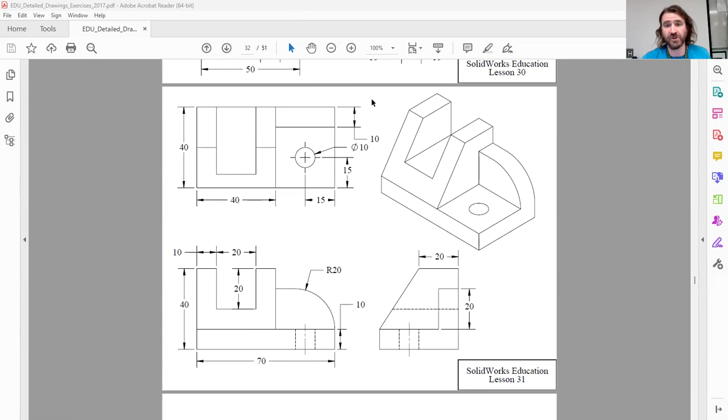We could start this from the front view and be completely fine, or we could also do the top view either way. I'm going to do the front view because this curve is here. This profile can be extruded 10 and it's done. This whole rectangle on the bottom can be extruded the distance of 40, and then we can cut that hole out after extruding. Then this shape can be extruded 40, and we can chamfer that to get this angled amount. That's my thought process with starting with the front view. You could do it at the top as well, but we're looking for the shortest, most comfortable path to get there.

There's a part file that we did earlier, and so is this one. You guys got a preview of an earlier video there, retroactively.

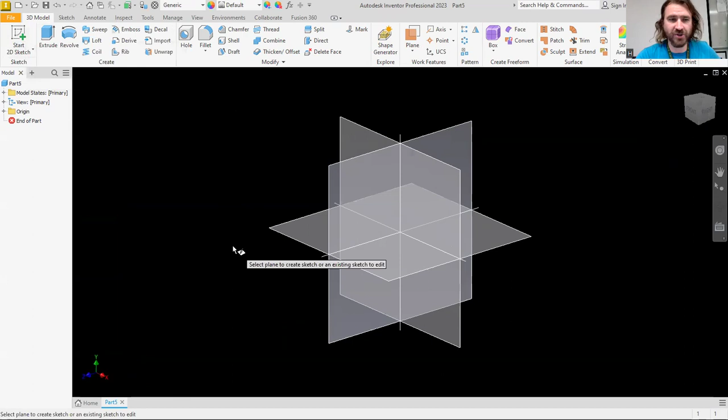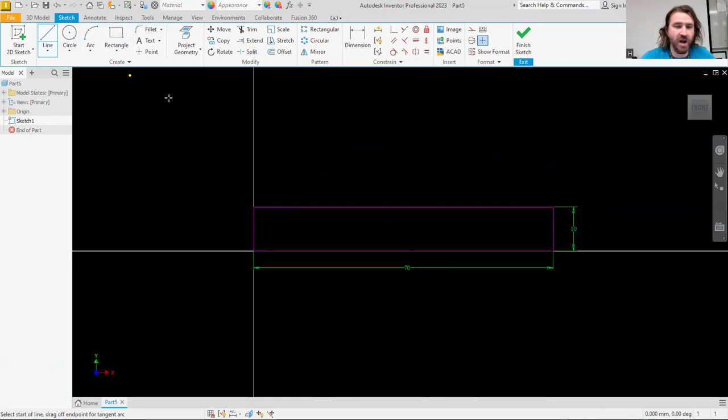So here we're starting our sketch for this part on our front XY plane, starting at the 0,0 mark. We'll go horizontally this time because it's 70, a nice long beginning line to start with. We're going up 10 because this is the first profile we're making, this rectangle shape. We could have just used the rectangle tool in hindsight, but either way we got there. Now lining up vertically, this line is 30, then this line is 10, this is 20, this line is also 20. I'm just kind of going around making 20mm lines here. There's another one, this is 10. I'm going to zoom out here in a minute because it's going to get tricky.

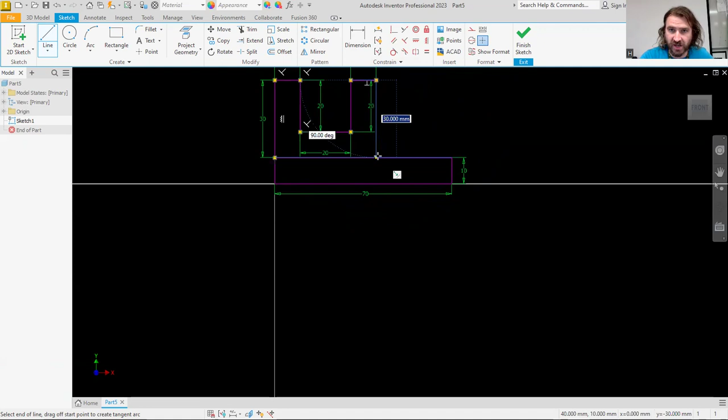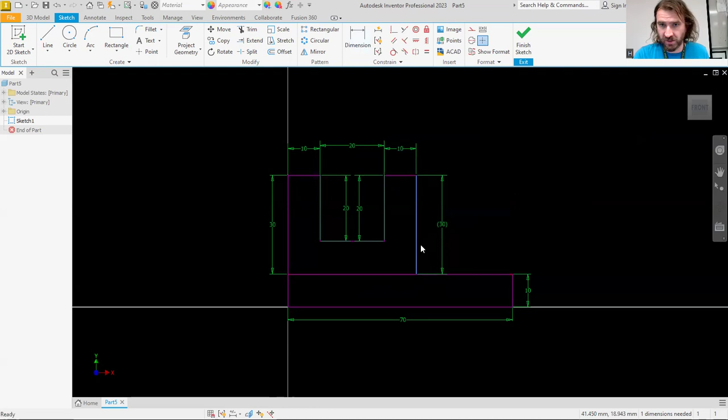Let's take this all the way down to 30, that way we have the profile. Let me zoom this out and clean this up a bit so we can see what is happening. All right, so there's our profile there. Let's dimension that, that is 30, 20. One dimension needed on this line - yeah, we're just going to leave it blue. So we have this profile here, this U shape.

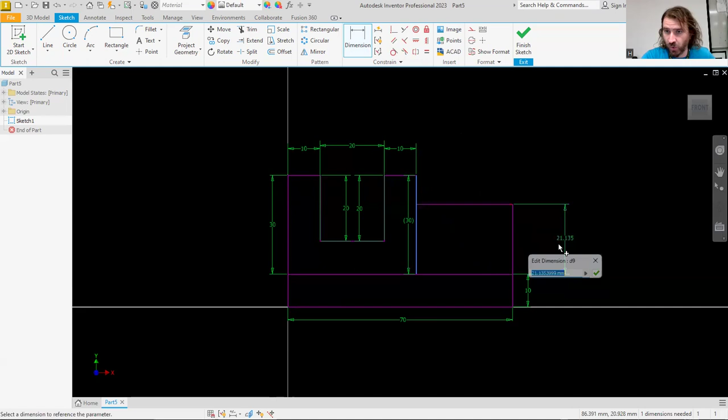Now we have this profile, and we just need the last profile with that curve that is there. So I'm going to draw straight lines and curve it after getting the lines in the right dimension, the right place. This is supposed to be 20, and that means this is 30, and it should be 30. There it is. So now that we've drawn the lines, we can use the fillet tool to do that curvature, and that curve is a radius of 20. There it is, perfect.

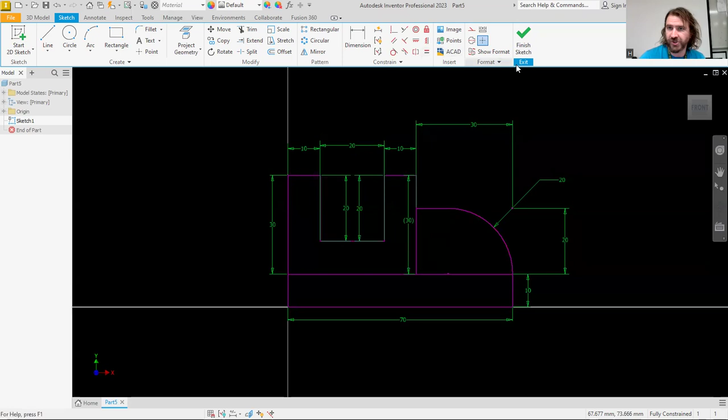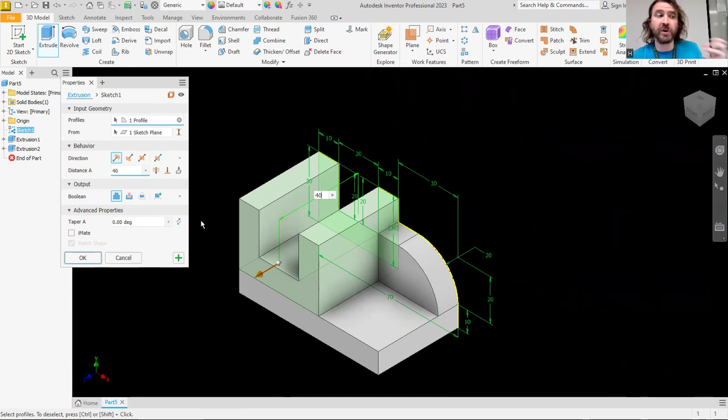So there's our radius 20 line. We have all of our profiles - that's our front view: the rectangle, this funky looking curved wall, and this U shape. Those are the three profiles we needed. Now we need to extrude them out at varying degrees of distance. This is 40, hit the plus sign. This one is 10 because it's just the small wall there, plus sign again. Then this U shape is actually 40 as well, going all the way to the edge, and then we're going to chamfer this, or if we can't chamfer it we could cut it at an angle, which we'll do in a moment. So there's our basic shape here.

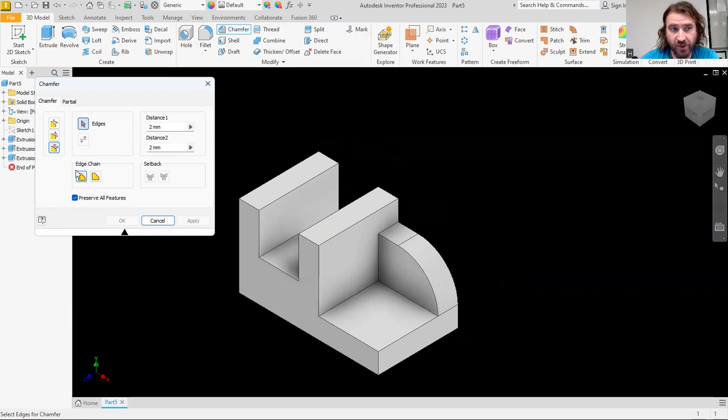So let's see if we can chamfer this - it might be funky, or we'll have to cut it out. I'll go to the chamfer tool, and it's two different distances: the horizontal distance is 20, the vertical distance is 30. Let me click this edge here and also this edge to make sure we're good. So the horizontal distance is 20 - oh no, that's the vertical distance, so 30, there it is. And the horizontal distance is 20.

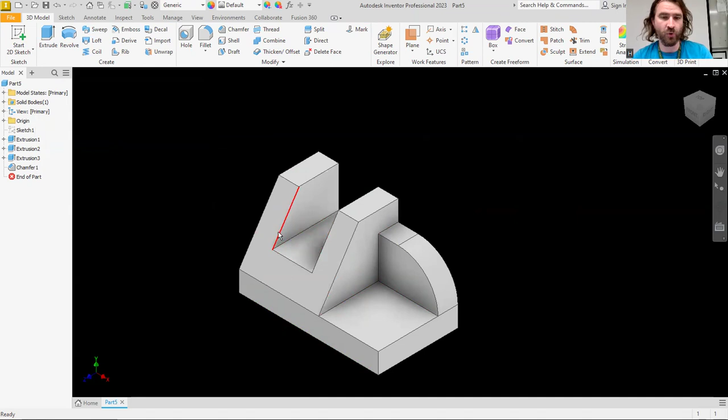There it is, okay, so we were able to chamfer that without any issues. That's good. The other option would have been to start a sketch on this surface and draw the triangle and cut out the extrusion, which would have been much more work, but the chamfer worked on both of those edges and we're looking good.

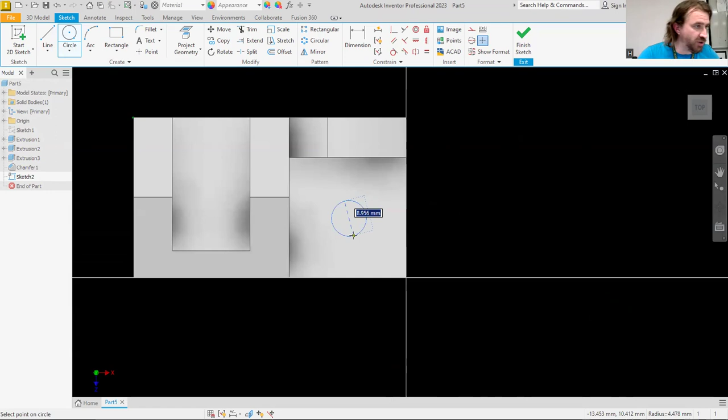The last thing to do is draw a circle on this surface and cut out the hole. So I'm going to start my 2D sketch on this surface, center my drawing a bit for a better view, and then draw a circle with a diameter of 10. I want to make sure the circle is dimensioned properly.

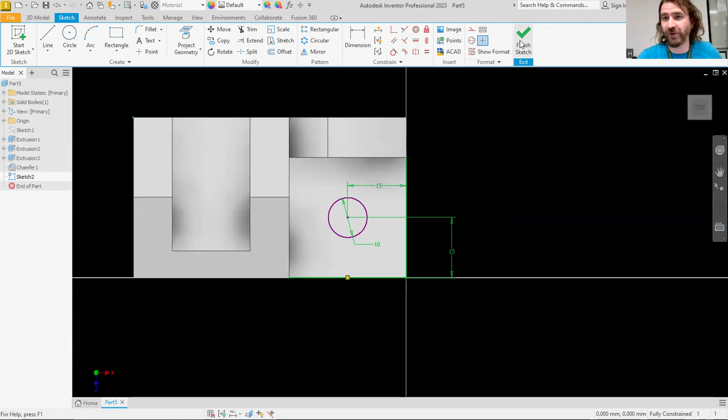You always need the vertical and horizontal dimensions of where a circle is placed in space. These are both 15, which is the first time we've seen a dimension that's not a multiple of 10 in this entire lesson packet. This is lesson 31, and honestly it's quite shocking because I didn't remember there was this non-multiple-of-10, 15 millimeter dimension.

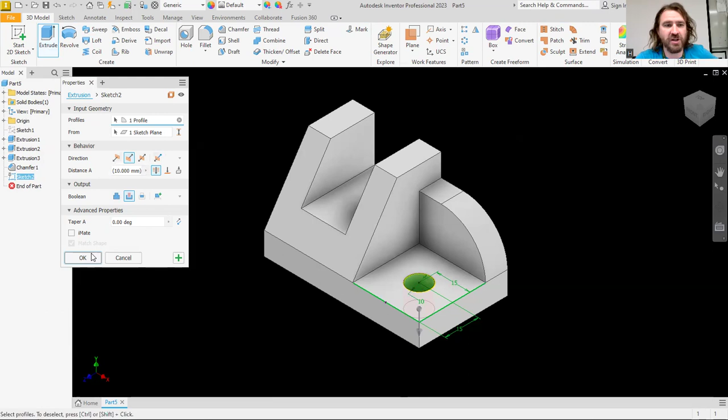Once we draw that circle, we got it placed. We want to go to the extrude tool, go to the cut function, and make sure we cut out that circle. And there it is — that's lesson 31 in this packet. Fairly simple part, with some interesting chamfer, some interesting fillet, and cutting out the circle. As you can see in our browser window, we went step by step through this and got ourselves to the final product.

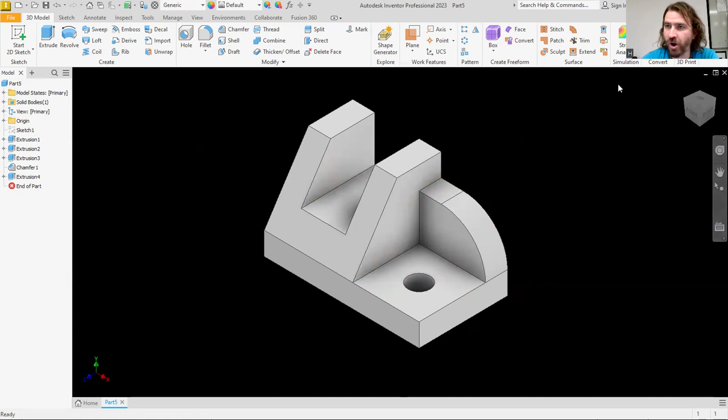Let's go ahead and open our new part file and drag this over to get to lesson 32, a very simple part. When you look at this part, there's probably no better example of the easiest view to see compared to what it is three-dimensionally, and where the most visual and numerical information is — it's the top view of this part. So if we draw this top view and extrude it 20 millimeters, the part file is done.

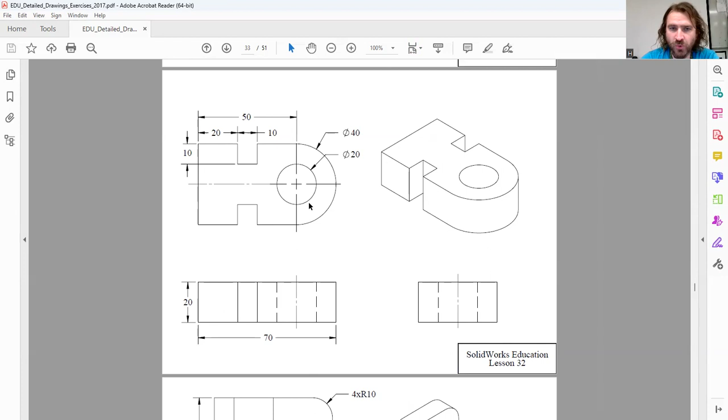This is a one-step part — one drawing, one extrusion, complete. Very simple, lesson 32, super easy for us. We just want to make sure we start on this top view. We'll do the circle tool first, then draw some lines in, and we're going to be looking pretty good at the end of this video.

So do the top view. We're going to start with the circle tool right here at 0,0 so we don't have to dimension many things. Let's zoom in, then diameter 20, diameter 40. We got two circles there. And then we're drawing some lines in.

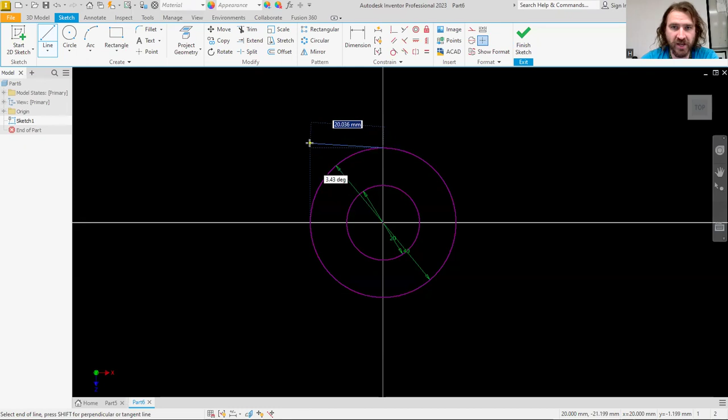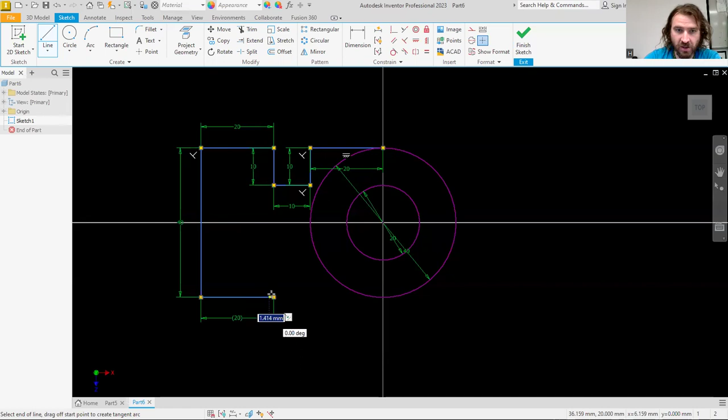We've got to draw a line coming this way. This line here is going to be 20 — double checking here. Then it comes down 10, then over 10, then back up 10, then 20 again, and then all the way down 40. And then it repeats — it just repeats this pattern of 10s and 20s. So I'm just going right over again.

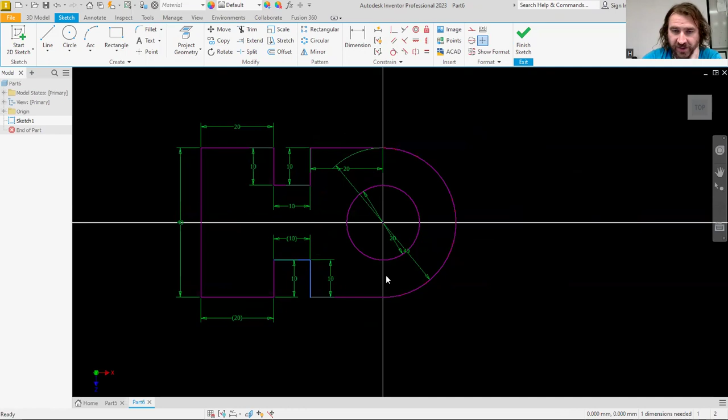Now there's a tool called the mirror tool — that's another video tutorial on my channel — we could mirror this, but you can just draw it; it's pretty simple and not that bad. We want to make sure these are lined up right — there we go, now we're good. Now we just trim out this circle here, since we don't need this whole line. So let's trim that out. There it is — we have our circle and our frame.

I'm going to finish the sketch and go to extrude — it's this inner profile here, extruded up 20. I'll hit OK. Again, it's just one extrusion, a very, very simple part file, drawing it from the top view and getting everything in there included visually and dimensionally.

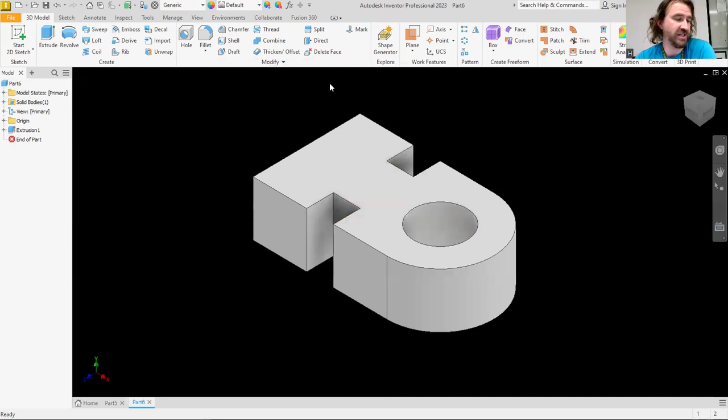And we're good. I don't need to really talk about that one anymore because it's pretty simple and easy, especially if you've been working through these lessons with me in these videos.